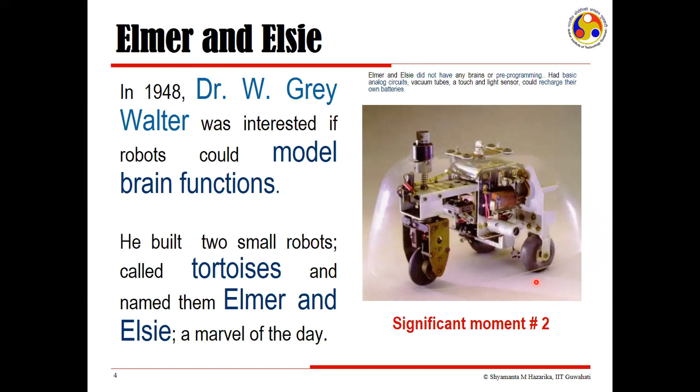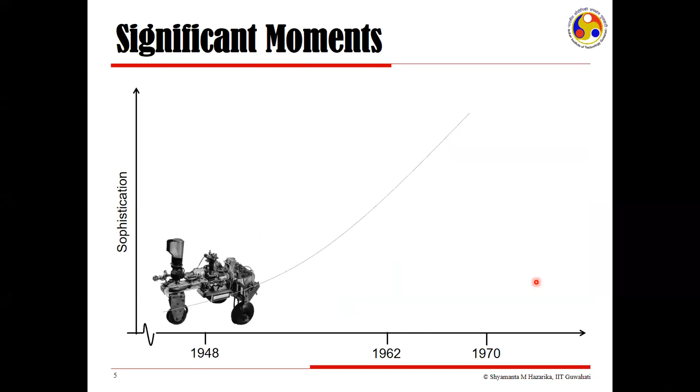More important than this and path-breaking in the history of robotics was the chance meeting of two persons around late 50s and early 60s. It was in 1956 that Joseph Engelberger, who was an aerospace engineer, met George Devol, an entrepreneur.

Joseph told Devol about a manipulator, something like the arm of our hand, that he was about to patent. Devol, being an entrepreneur, saw what this could be in the future, and they together formed Unimation Inc., the world's first robot maker, and came up with this Unimate robot.

But then nobody was ready to use that until they could justify the use of the Unimate robot for General Motors to replace human workers in terms of safety. So General Motors in 1962 became the first company to install Unimate, a robotic arm, to extract hot parts.

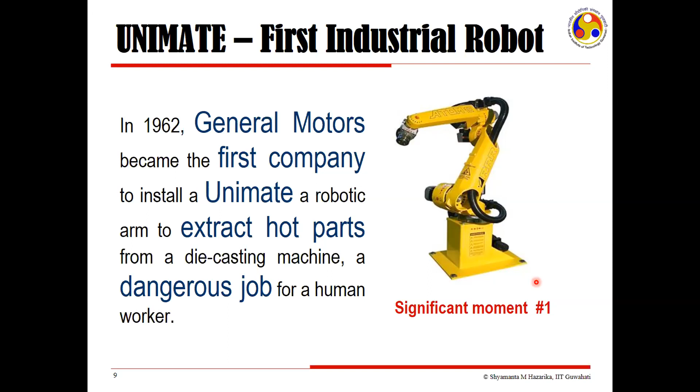This, according to me, is the most significant moment in the history of robotics. Starting from Aristotle's dream, to Jacquard's loom that he found out in the 1800s, to Walter's mobile robots in the late 40s, the making of a robot or manipulator that could be used in an industry happened in 1962. And this is significant moment number one in the history of robotics.

As we come forward in time, the sophistication of the robots increased as well. So this graph that I'm trying to draw for you, squeezing a lot of history, just taking three important points in the history of robotics, is also showing how sophistication has increased over time.

It was in late 60s and early 70s that the Stanford Research Institute, they were working on what are called mobile robots. And they came up with these robots which had camera, laser rangefinder, radio link, and a robot that could make its own decision.

But then, because of the low computational power at that point of time, it did take a long time to come to a decision based on the data being received at its different sensors. And when it moved, it used to shake vigorously. They named this robot Shakey.

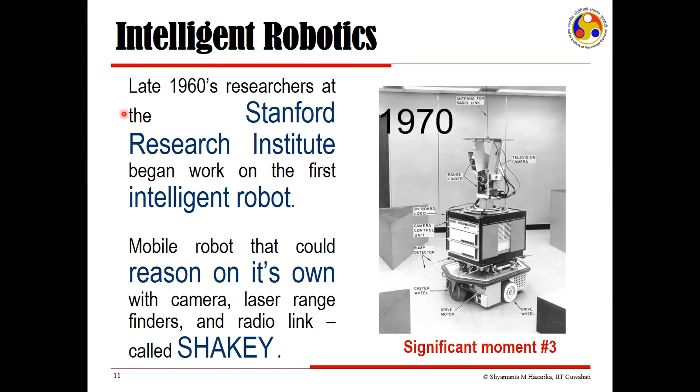So we have looked at three interesting moments in the history of robotics, starting with vacuum tubes being used to really come to decision making. Thereafter, manipulators making their first presence felt in the industry. And finally, intelligence, or the idea of sensing, planning, and thereafter acting.

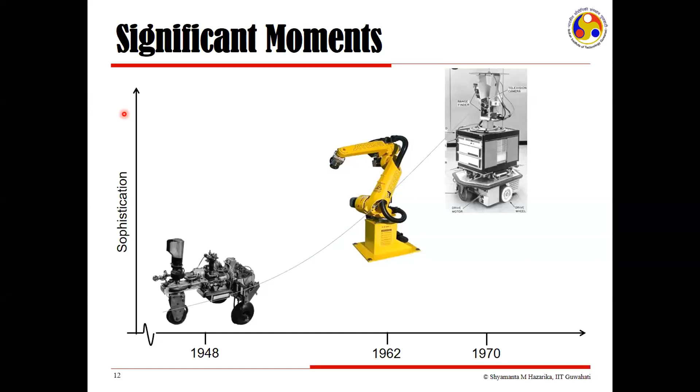That's what intelligence is. You sense, you plan, and you act. So this SPA, sense-plan-act cycle, was introduced into this intelligent robot called Shakey. This pushed forward the agenda of intelligent robotics.

So that brings us to a very fundamental question of what is a robot? Or what do you understand by a robot? The Robotics Institute of America defines robot to be reprogrammable, multifunctional, and something that does perform a variety of tasks.

A microwave is not a robot. Whereas if you have a machine that could microwave food as well as do washing of clothes, as well as move utensils in the kitchen, that could be a robot if it could be reprogrammed. So a reprogrammable multifunctional manipulator, which can move material, parts, tools, or specialized devices for performance of a variety of tasks, according to the Robotics Institute of America, is a robot.

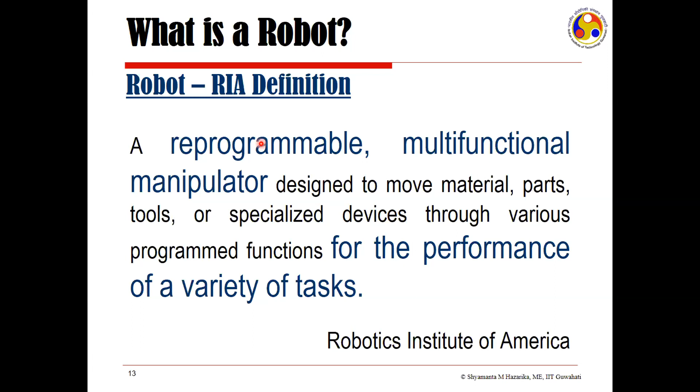And this is the working definition of a robot for most of the research that's being carried out today, where reprogrammability is the key, apart from the instrument being multifunctional.

On the other hand, the Japanese, particularly the Japanese Industrial Robot Association, had a very down-to-earth definition of what is a robot. For them, if you have a light-sensitive door mechanism, which opens as you come near and closes as you go away, like what you see in malls most of the time, is a robotic device.

So according to the JIRA classification, robots could be manipulators, which are manual, sequential, or programmable. In fact, the JCB machine that you see working on roadsides, lifting a lot of garbage and putting it in another place because of a hydraulic manipulator operated by a person sitting inside the cabin, such JCB machines are robots according to JIRA classification.

We then have numerically controlled machines, which are the lathes, CNC lathe, CNC milling machine. Everything, according to the Japanese Industrial Robot Association, is a robot.

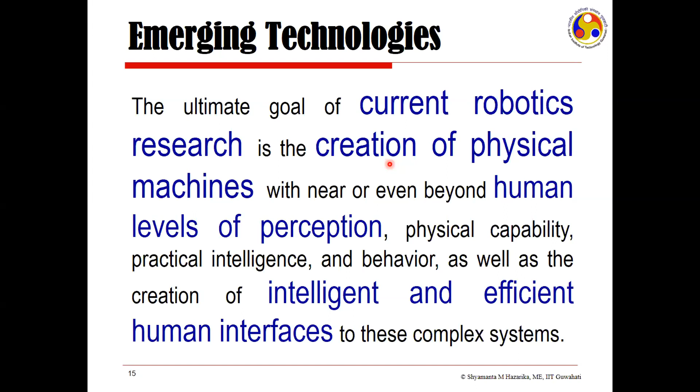And that is what is happening over these years. And that has at its back the idea of what is called artificial intelligence. So what do you mean by artificial intelligence? If I have to do a task which was performed by a human, so how does a human perform tasks? Humans acquire the ability to learn a given task and then solve different problems.

So if I'm talking of artificial intelligence for a machine, then artificial intelligence is demonstrated when any task that requires the ability to learn can be done by a machine. So if I have a machine that has the ability to learn to do a task, I say I have AI.

It was Alan Turing in 1950 who published his landmark paper called Computing Machinery and Intelligence. And in that paper he speculated the possibility of creating machines with intelligence, and he laid down the foundation by starting his paper by saying, can a machine think? So Alan Turing started his paper by saying, I propose to consider the question, can machines think? And goes on to define what it means to think and what it is to be intelligent.

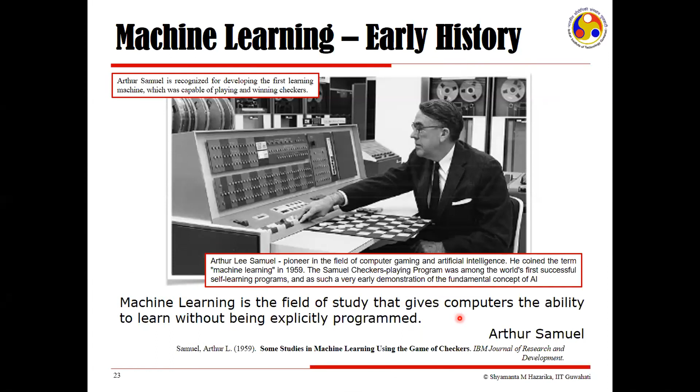So in terms of Mitchell's definition that I showed you a little while ago, a computer program is said to learn from experience E with respect to some class of task T and performance measure P. For a checker learning program, if T is playing checkers, P is the percentage of games won against opponents, and E is playing practice games against itself, then as I increase E, my P must increase because the checker playing program is learning how to play the game.

According to Samuel, in his paper, after he had done these experiments, he showed that the checker playing learning program could learn better than the people who had programmed it. And this was something very exciting, because it showed that computer programs could learn on their own.

So that laid the genesis of machine learning, which is about building a model that is a good and useful approximation to the data coming to it. Then learning is about getting a program so that it knows how to optimize the parameters of the model. And that's what learning is.

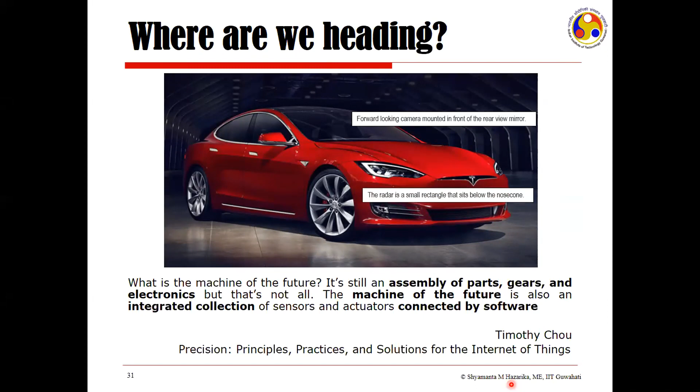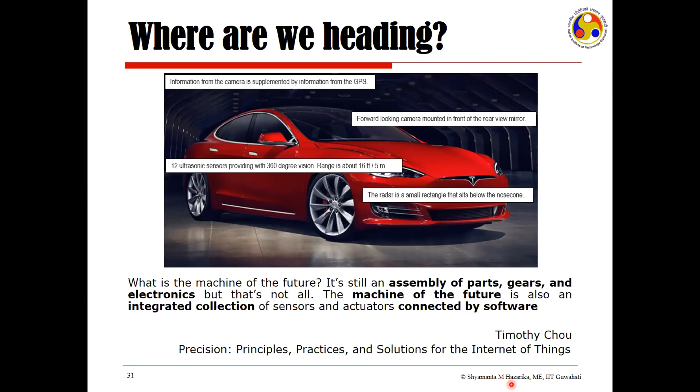Like, for example, most of you are aware of Tesla's cars. It has a huge number of sensors: a forward-looking camera mounted in front of the rear view mirror, a radar below the nose cone, ultrasonic sensors providing some 360-degree vision, and information from the camera supplemented by information from the GPS. All of this makes it, according to Elon Musk himself, not a car, but a sophisticated computer on wheels.

So that's what the machines of the future would be: integrated collections of sensors and actuators connected by software. And that is driving a huge change. What is the change? Let's try to understand this in order to understand what is called Industry 4.0. For that, let's take a look at the history of the Industrial Revolution.

The first Industrial Revolution was about introducing mechanical production machines powered by water and steam. So as I was telling you the history of robotics, I did mention the Jacquard loom, which was one of the first automated looms that used punch cards for its control.

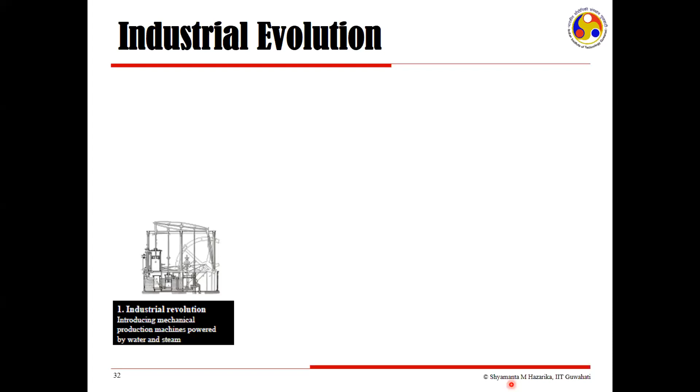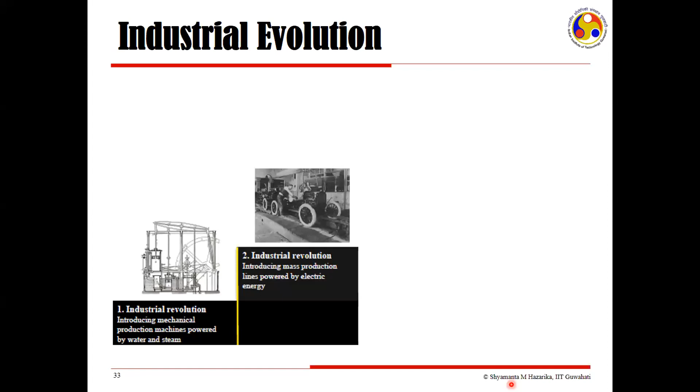Then, as technology moved, there was the introduction of mass production lines powered by electrical energy. So steam gave way to electricity. And then we had the use of electronics and IT, further progression in autonomous production. Today, we have what are called cyber physical systems.

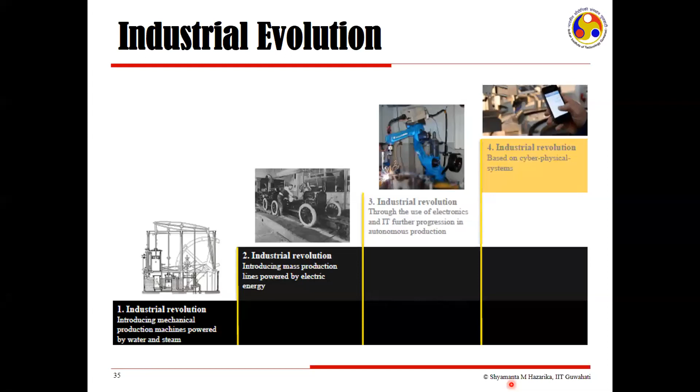So in order to understand where we are heading, you need to understand that in the 1700s we had Industry 1.0, driven by water and steam power. By the 1800s, we had Industry 2.0, electrical energy. Industry 3.0 was about IT and electronics. And today we talk of Industry 4.0, which is robotics, AI, and big data.

Many people do not want to acknowledge machine learning per se and say it is about data. But the idea is that data is generated because of sensors, and these sensors need to give me experience. And this experience needs to really improve my performance as I understand these sense readings. That's nothing but ML. So I would love to say Industry 4.0 is about robotics, AI, and machine learning.

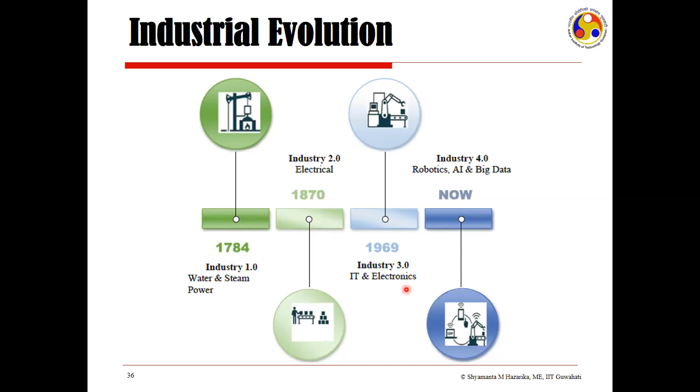Given this scenario, where the current trend is towards automation and data exchange in whatever technologies you talk of, manufacturing or service or any other industry, this has led to what are called cyber physical systems. I will come to that in a moment. And all of these are put together in what we call the Internet of Things.

Now, all you got to really understand about Industry 4.0 is that mechanization gave way to technological electrification of production lines, then computer, internet, digital manufacturing, and then the convergence that is happening today. The convergence is something that is very, very important, and that convergence is possible because of machine learning and AI.

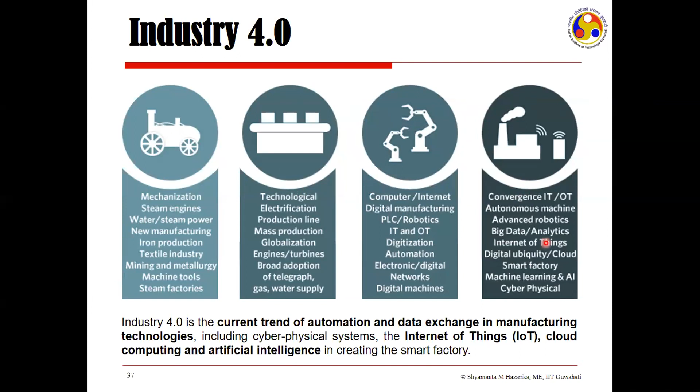So the building blocks, if you really want to understand the idea of Industry 4.0, you need to understand that it is coming from intelligence, and intelligence is coming to us from sensing. So basically, smart sensors, a lot of exposition on sensing technology, and how to take control of these sensors, together with the fact that the control may not be on the machine itself, but somewhere else. And because of connectivity, I can still take a decision at a different location and convey it to the controller on board the machine. The connectivity issues.

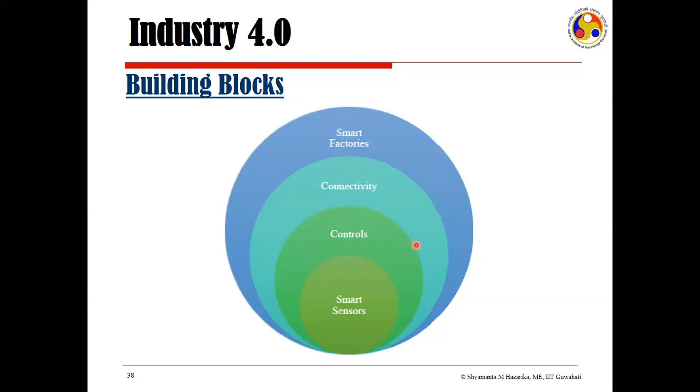All of this has given rise to the concept of smart industries or smart factories. And that has led to Industry 4.0. Now, if you look at this idea of connectivity,

Connectivity could be seen in three different dimensions. In one, it is about all the integration that's happening in the vertical and horizontal value chains. That is, within the industry itself and across industries, the integration that's happening because of technology. And then the digitization of products and service offerings. Now that you can call a plumber home by just going to the internet is something that's pushing this idea of digitization of products and service offerings and digital models of business.

So mobile devices, IoT platforms, location detection technologies, advanced human-machine interface, 3D printing, smart sensors, all of these and their integration is changing the landscape of Industry 4.0. But at the crux of it remains what we refer to as Internet of Things. So what do we mean by Internet of Things?

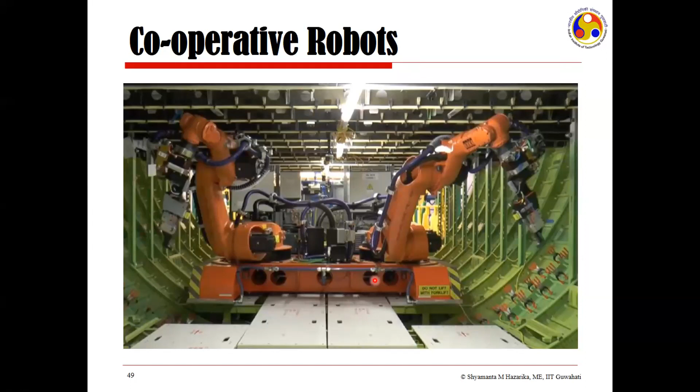So a collaborative robot will work in direct cooperation with humans inside defined workspaces in both industrial and non-industrial environments. In non-industrial environments, the most interesting case is in the biochemical industry, biochemical labs, particularly in microbiological experiments. This has led to the concept of what is called augmented workspace. So the workspace or workplace that we have is no longer about the human working alone, or the human completely replacing that with a robot.

So it's not about mechanization. This is where most of us as mechanical engineers make a mistake. Bringing in robotics is not about mechanization and automation alone, I think that idea is long lost now. It's about augmenting our capabilities. So the human, whatever way he can work, he works, and the machine augments his capabilities, improves his capability of working better. It's not about replacing him with a machine.

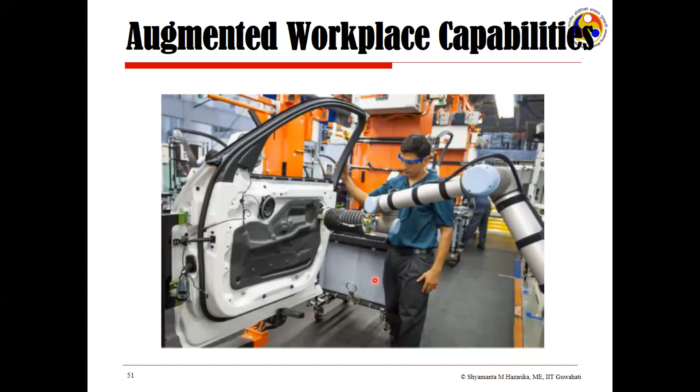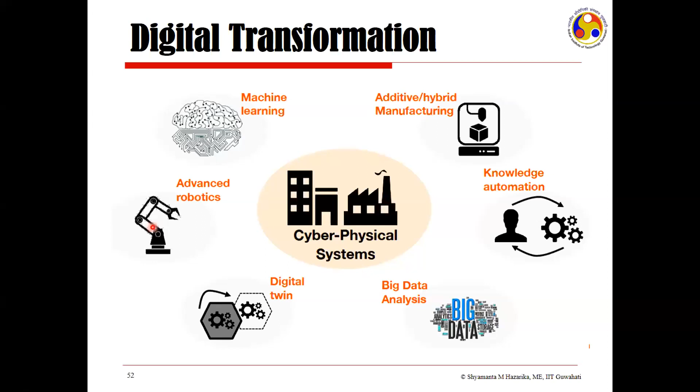And then there is this digital transformation that's happening. We have machine learning, additive or hybrid manufacturing, knowledge automation, big data analytics, digital twins, and advanced robotics. All of these brought together create what are called cyber physical systems. I have taken most of my time to describe to you what machine learning is. I will also try to talk to you about what digital twins are, so you get some idea of what it is we are talking of. Cyber physical systems is the crux of what drives Industry 4.0.

What is a cyber physical system? It is about putting three things as collaborating computational units. What are the three things or elements? One is computation, another is control, and the third is communication. So when you put communication, computation, and control as collaborating computational elements for any physical system, you end up with what is called a cyber physical system.

The main crux joining them is information. So you have a control system giving sensor readings. That information needs to be communicated, and via communication it reaches computational elements where it is computed, meaning is made, and some action is taken. That is given back to the control. This leads to a cyber physical system whose operation is about monitoring, coordinating, controlling, and integrating by communicating and computation via a control system.

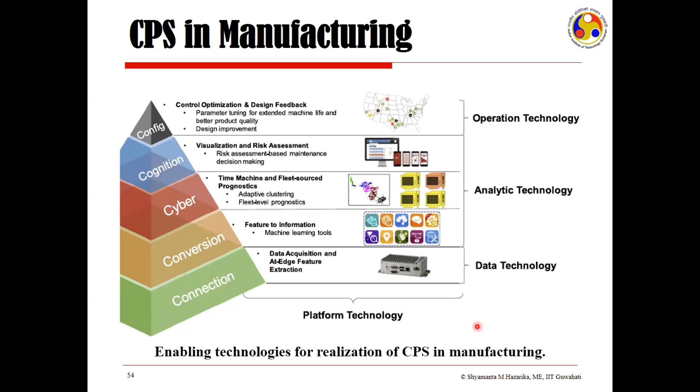As the technology platform is changing, with different technologies chipping in, from connection to conversion to cyber to cognition, or making meaning of what is happening, to configuration, we are moving towards cyber physical systems in manufacturing, leading to very interesting emerging concepts, like agile manufacturing.

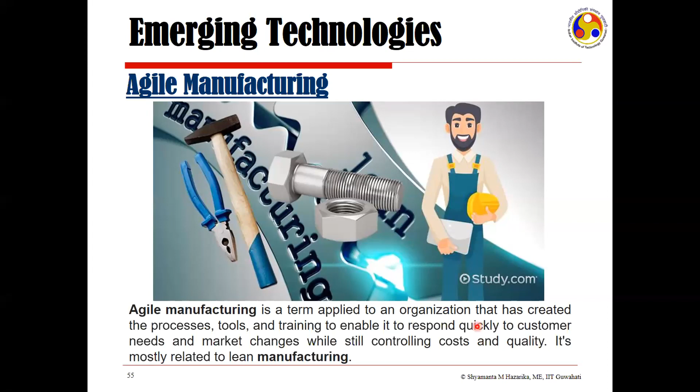Agile manufacturing is about process, tools, and training that enable us to respond quickly as markets change. It is something very close to what we had years ago thought of as lean manufacturing, but with sensing technology and communication coming to us, we are now talking of responding quickly to the needs of the customer and market change, leading to what is called agile manufacturing.

So what are the four core values made possible because of IoT, which makes agile manufacturing the crux of Industry 4.0? Now we have a lot of flexibility in design made possible because of data and information we have of failures and past experiences.

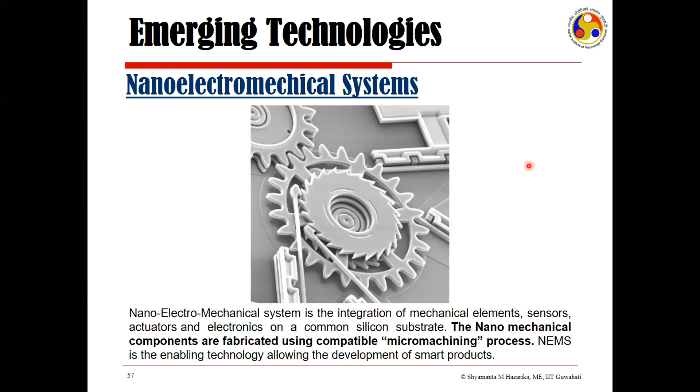Nano electromechanical systems are coming in a big way. These are mechanical elements, sensors, actuators, electronics, everything on a silicon substrate. This is a technology I would pinpoint as the enabling technology, allowing development of smart products or smart sensors and actuators, and smart sensors and actuators are driving AI to drive robotics driven Industry 4.0.

One technology where I'm proud to say India is the world leader, an Indian company, Voltas, a Tata company, is the world leader, is the concept of digital twins. Digital twins are something that's changing the way you operate. Digital twins are digital representations of real world objects.

So they are not just the CAD model or the finite element analysis model, nor the physics model alone, statistical model, or the machine learning AI model that I've been talking of. They are everything. They are an avatar of the real machine.

So you create this real machine, you create the avatar of the real machine, the digital twin model. You operate this digital twin model because it is a digital model, so you can operate it over tens and thousands of cycles, get all the metadata, monitor it, create analytics. And then from the operational history, maintenance history can be created. You can aggregate the complete field data.

So this then can drive the way I look at its life cycle in its actual deployment. I can control completely by controlling things in the digital twin model. Any new data generated will again drive this digital model to create better understanding of its operational and maintenance history. This is the emerging technology where you put robotics, AI and ML together with this integration of digital technology.

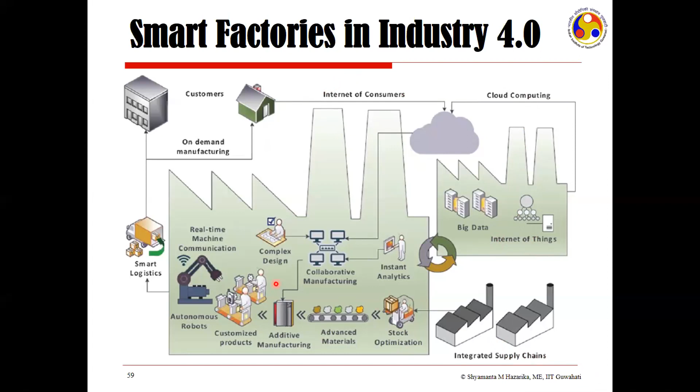Where is the future? Where are we moving? Real-time coordination of value chains, flexible, customized mass production, predictive, proactive maintenance, digital mapping, virtualization, reduce complexity cost. These are going to be the future research areas that one needs to really look at when one is talking about Industry 4.0.

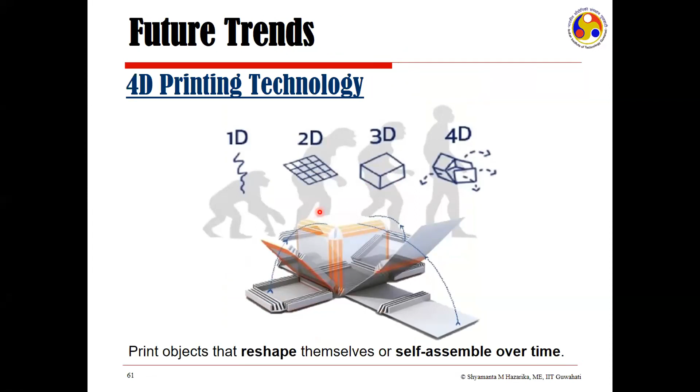3D technologies, 3D printing or rapid prototyping is already there. People are now talking of 4D printing, which is objects that reshape themselves or self-assemble over time. After being printed, they can go for self-assembly. And people are talking of what are called living materials - materials that have the ability of self-assembling or the potential to really self-heal. So such living materials is what's going to come in the near future. And that will again see a huge change to another era of industrial revolution.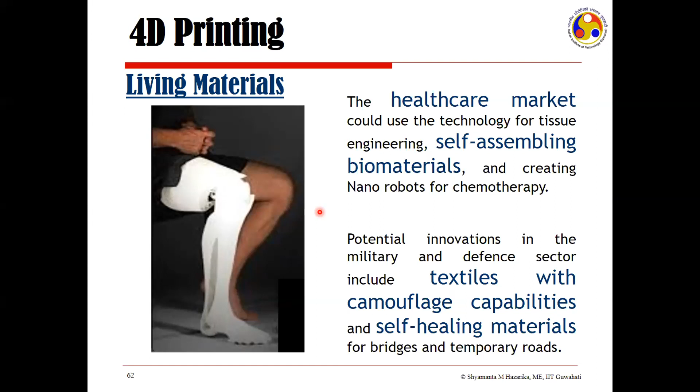To finally wind up my talk, I would love to emphasize that as artificial intelligence has emerged from science fiction today to really be at the frontier of world-changing technology, the systematic deployment and implementation of AI/ML will see a generation of industrial systems that's going to drive Industry 4.0. And at the back of it will lie advances in robotics, advances in artificial intelligence, advances in machine learning, with all its digitization capabilities and integration capabilities brought through the cyber physical systems.

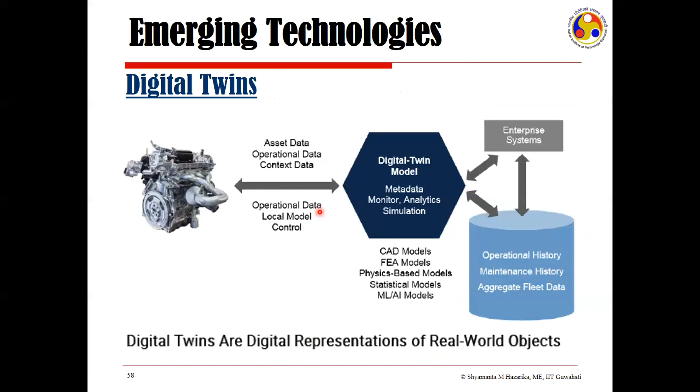Thank you very much. If you have any questions, I would be very happy to take them at this point of time. Else we'll call it a day. Thank you for your kind attention.